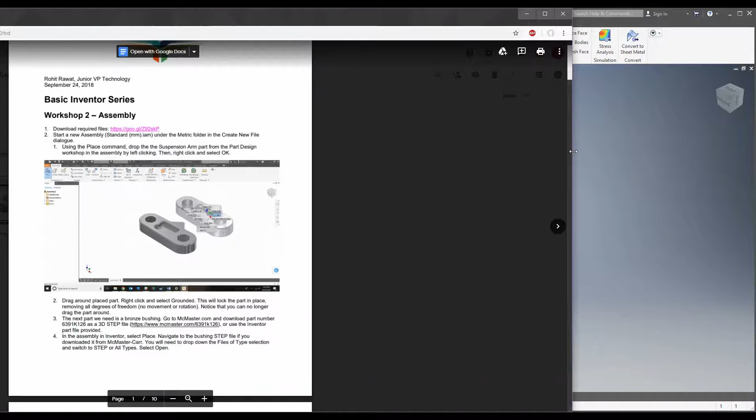I'm just going to hop right into it. Actually, before I do that, if you don't have the files from the first workshop, which chances are you don't, you just go to this link and they will all be there. You can download them as a zip and then extract them somewhere so you can use them, and then you'll be all set to go. You'll have this one and a number of other parts as well.

So today the workshop is on assembly. Currently I have a part open, just one of the parts we're going to be using today. We're not actually going to be editing in part mode. You can tell if you're in part mode because of all the tools up here that you have, like extrude, revolve. Those are all for making parts, obviously.

So our first order of business will be going up to File, New, and under Metric, you want to select Standard Millimeter.iam under Assembly. Ignore everything else. This is what you want. You just double click it, open it up.

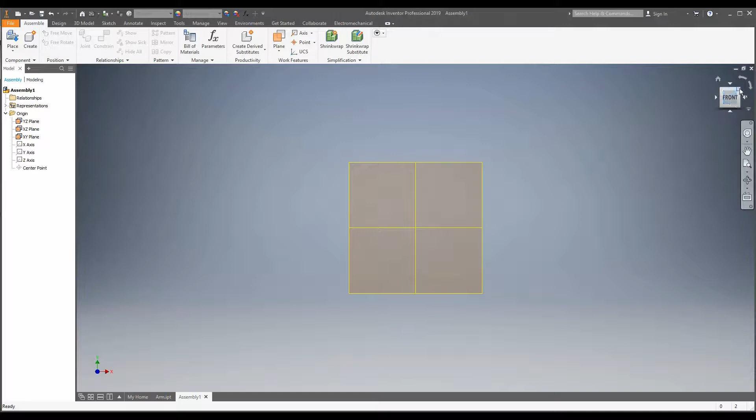It'll take you like 10 seconds for your computer to load it, and then you'll be in this workspace. It's the exact same thing as your standard part workspace. You have your three planes. You can look at them like this. You can rotate it around, same deal as always.

So what assembly is, basically, you just assemble a bunch of parts together. You won't have to make any edits to the parts themselves. You basically just define how they are placed together. Now, I can't really do anything at the start without actually having a part.

So let me just place that into my assembly. You go to Place, and you want to navigate to wherever you have the workshop files saved from where you downloaded them. Once you've extracted them, you should have a folder called Workshop 2 Required Files, wherever you intended to save them to. Go into Workshop Required Files, and you'll have all these parts here. Now what we're going to start out with today is we're just going to go to arm.ipt, double click it to open it up. There'll just be like a ghost of this part kicking around somewhere. Just click it once to place it onto the screen, and bam, look at that, beautiful, gorgeous.

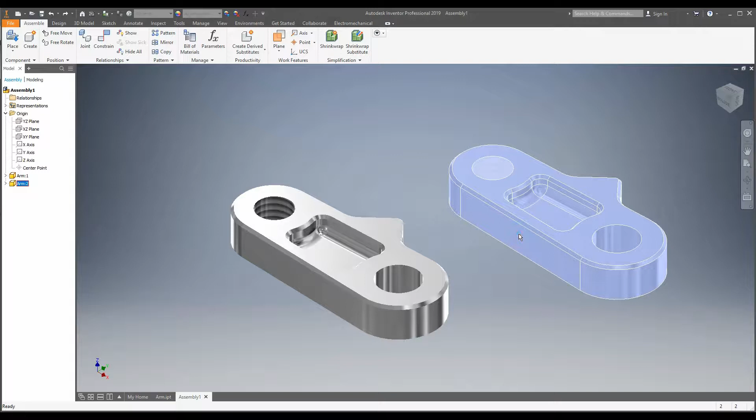It's even got shimmering edges like a steel part. As you'll notice, you're still in the tool. You can tell if you click another one of those around, that's not what we want. To exit out of this tool, you can either hold right click and then go over to OK, or you can just click the escape key. We actually only want one of these though, so just click on one, press delete. You can press the delete key on your keyboard, or you can right click it and say delete.

Easy peasy. Now, a good way to start any assembly is to have one part you want to use as your base part and reference everything else towards it. So if we wanted this part to not move, everything else should be in reference to this part. Right click it, and you go down to grounded. This is a very big menu, just find grounded in there.

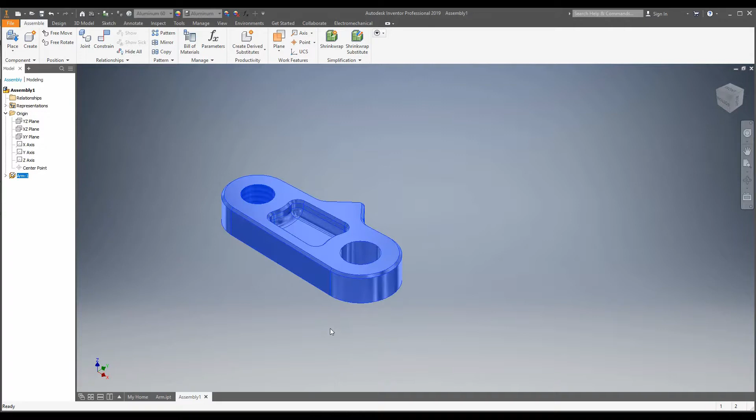When you click it, what it does is it just makes this part, even when you try and click and drag it somewhere, not able to be dragged. If I disabled grounded, I could just move it around however much I wanted, right? Because it's not grounded, obviously. That's what grounded means. So once we have our part grounded, we won't be able to move it. You can check it out however much you like.

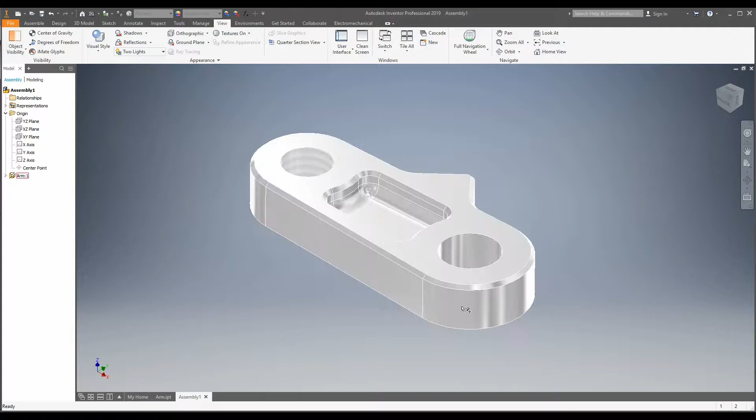One change I'm actually going to make, because I find it easier to work with my parts, is go to View and change Visual Style to Shaded with Edges. You can see it brings out all the actual edges that you can work from on your part. It makes it a lot easier to visualize what you can select when you're doing your constraints in assembly. So once I have all this selected, I'm just going to go back to Assemble, and I'm just going to go over a brief snippet of how you can navigate around your part.

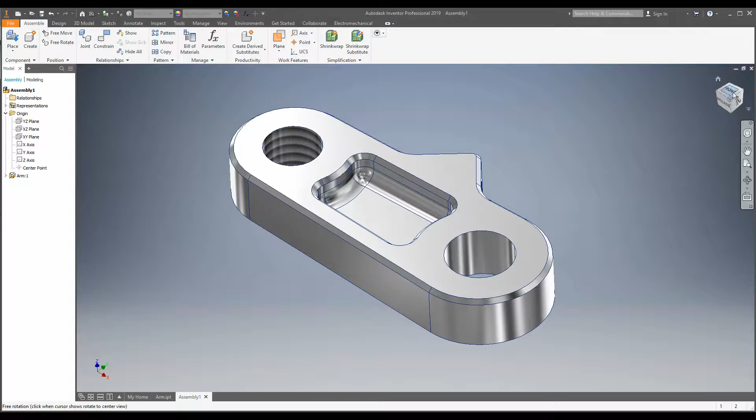So you'll see up here you have the cube. This is your ViewCube. If you click it anywhere, you've probably used it before. I'm assuming you've used Inventor before, and you can use this cube to change all your orientations.

Now, there's a few other ways you can rotate it around. Basically, the principles of CAD involve spinning things a lot, so there's obviously a lot of shortcuts for this, and you'll definitely get better at being able to navigate it. Obviously, zooming in and zooming out with your mouse wheel will help a lot. It's a great tool to have. So make sure you have a mouse. If you try to CAD on a trackpad, I feel sorry for you.

Another way, if you do have a trackpad by any chance, go over to this. It's called the Orbit tool. And you can just drag it around with left click. Simple, easy peasy. Drag it around.

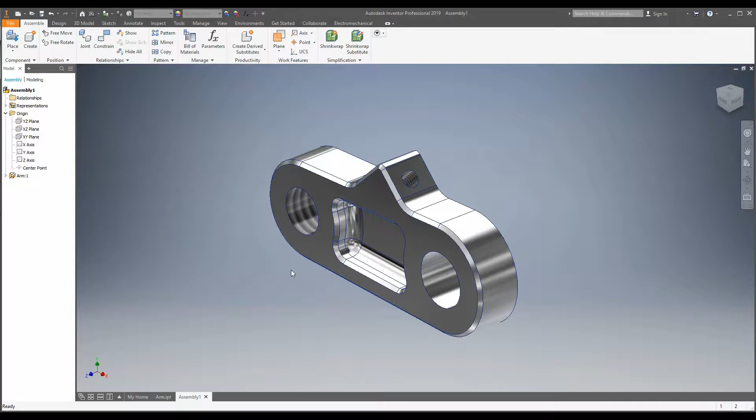Pretty self-explanatory way of rotating your part around is to hold shift. This is only if you have a mouse, but if you hold shift and you hold the scroll wheel of your mouse, so that's like the middle button, if you hold both of those down and you move your mouse around, you can actually rotate it extremely precisely and do whatever you want. Let's say I wanted to look inside this hole. Bam, I can look inside the hole. It's very, very fluid, you'll find.

It is quite annoying holding shift, but as long as you're set up in a comfortable zone, you have a desk and everything, it shouldn't be too big of a deal. So I'm just going to go back to this view, our default isometric view.

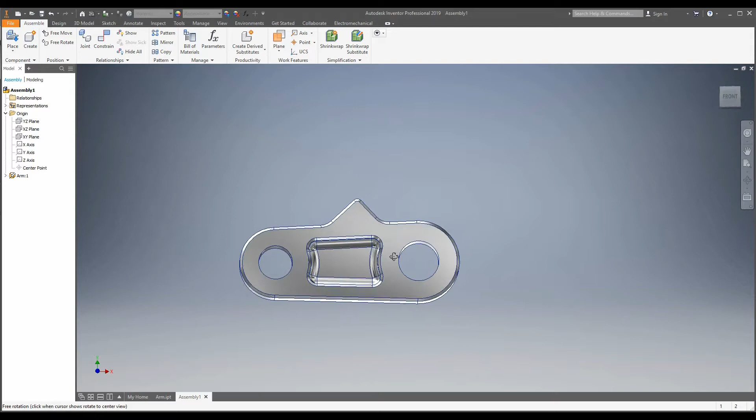Now, what I'm going to do is start putting parts together. Currently, this is one part. It's just got a few threaded holes and an emboss in there. We want to put some bearings in this thing, because, well, I'm actually going to keep it a surprise as to what it becomes later, but we're just going to put some bearings in this.

And basically for any fastener or bearing, anything like that, bolts, a really great website to go to is called McMaster-Carr. You can see it right here, and as you can see, there's tons of different stuff you can select from. Right now we want to select a bearing. So, for the purposes of this workshop, just go to McMasterCarr.com. You'll see a search bar up here, and search 6391K126.

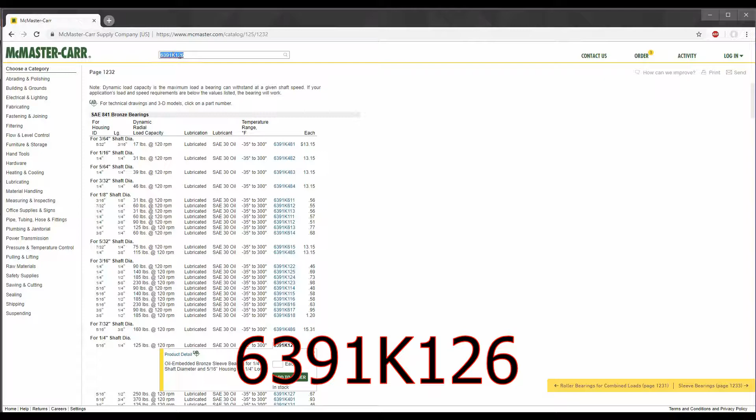When you do that, it'll bring you to this almost spreadsheet-looking thing. And when you go down here, there will be a window opened up under one of the parts. This is the part we want. It's got the part number here. And so what we want to do is we want to get a CAD model of this bearing.

And we want to put it in Inventor. So to do that, we just hover over here, Product Detail. You'll see a little symbol next to it that says CAD with like a little target. Just click it. Easy peasy. It'll take you to this page.

It'll give you a nice little drawing of the part, show you all the stuff that you probably don't care about if you're in first year, but these are all lengths, outer dimension tolerances. It gives you a really simple drawing here.

And what you want to do is go to this drop-down menu right up here, as long as you can see it. Hopefully you can. And I believe it'll probably be defaulted to 3D SolidWorks. You want to select 3D Step.

Now, a step file is a kind of CAD file that any CAD program can use. So if you wanted to use a part from SolidWorks and put it in Inventor, you would save it as a step file, and then you'd open it up in Inventor as a step file. So the step files are really handy for that. So click Save.

It'll download. Then you're going to put it in the same folder as all your other Workshop 2 files. Bam, it's in there. I already have it saved, actually. So then we're just going to exit out of here.

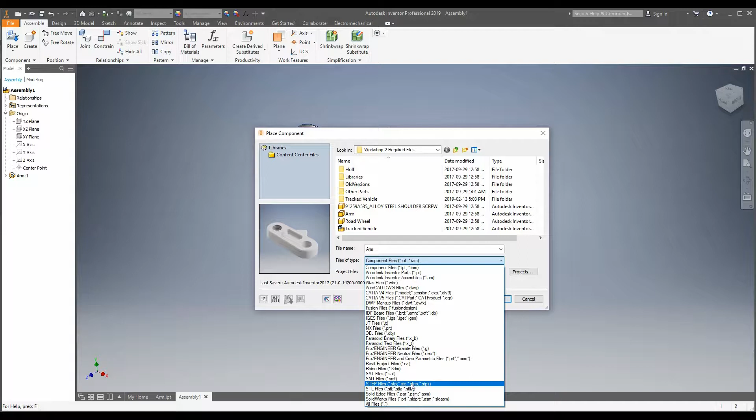Now we're going to go back to our assembly, and we're going to go to Place. To place your tool, see, when you go into Place, it'll have it automatically selected that you can only select Inventor part files and Inventor assembly files. So we're going to go up to Files of Type, and we're going to scroll through this big list until we find step files. It should be right down the bottom in the S's near STL. Click it, and you should be able to see your bearings.

I'm going to select this one I just downloaded at 5:20 p.m.

And it should open up this menu here. It should automatically have all of these settings selected, but if it doesn't, make sure your settings look exactly like this. Make sure Convert Model is on. That's the most important one, because it converts your step file to a workable part file in Inventor. So once you have all this selected, click OK, and bam, it'll come up.

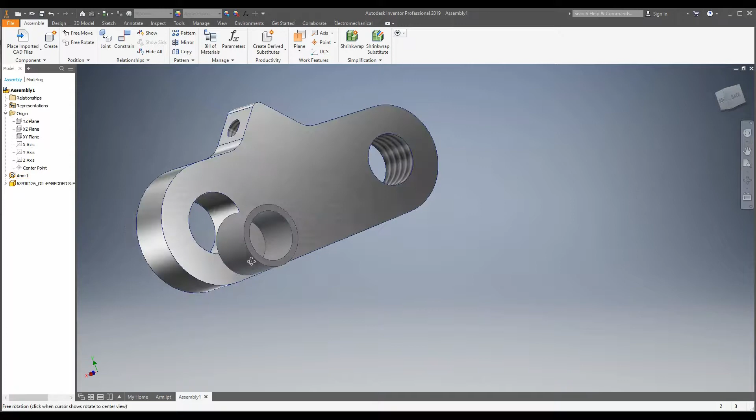Exactly like the part you had before. So place the bearing down anywhere, same thing as always. Make sure to press escape to exit out of the tool so you don't place a ton of them. And here we go. We have a bearing which we can actually move around because it is not grounded. But this, we still can't move it. We still can't move it because it's grounded, and that's exactly what we want.

So once we have our bearing in, we need to find a way to put this bearing in this hole. There's a number of ways you can do this. We usually want bearings to be rigid in this hole, so that it's in the hole, it can't move out of the hole, nothing's going to get it out of there. So nothing's going to spin inside. There's a number of ways we can do this.

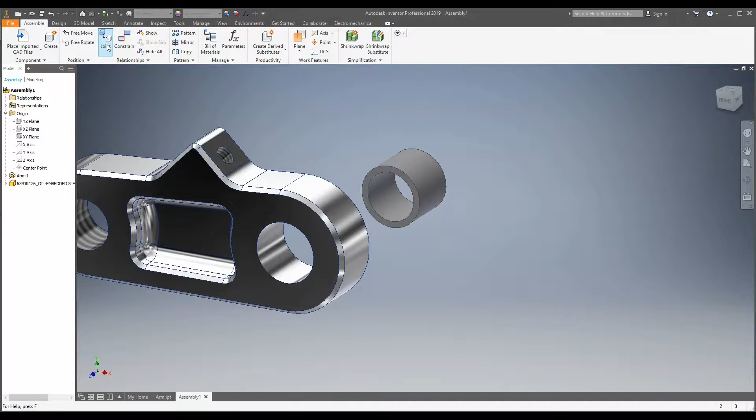We can use the joint tool, which automatically determines the relationships between your component and your assembly, or we can use constraints, which allows you to more specifically adjust how the parts interact with each other. I'm going to start out with the joint tool because it's super duper easy.

So we go into the joint tool. It comes up with this interface. You'll see you can connect your first origin, your second origin, and then it'll ask you for your type. So like I said before, we don't want it to spin or anything. So the type of joint we want for this case is a rigid joint. Click rigid.

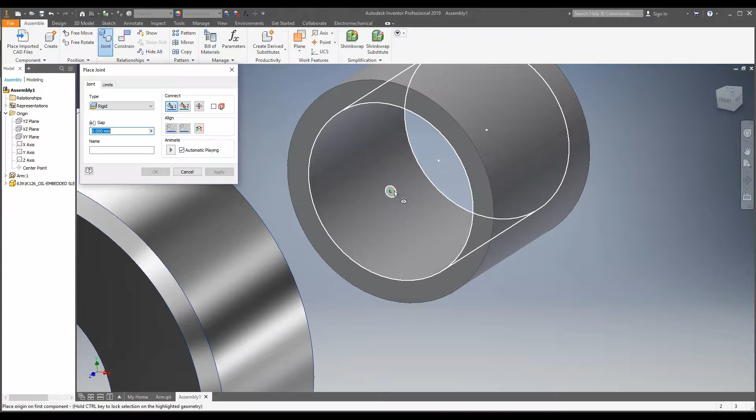Keep gap at 0. Now, for the first selection, select your bearing. Make sure it's your first selection. When you're going to select it, it should come up with these little green circles that don't exist. This is just showing that you're selecting the circle, like the extrusion. Select it. It'll come up with this, and it'll automatically select your second component option. And for your second component option, we just want to do the same thing with the hole on the arm, right? Right here.

And bam, it'll give you this nice little animation of the bearing going into the hole and showing that it can't move around. See? Once you've done that, click apply. And bam, we have a bearing. When we try to click and drag it, it does not move. That's exactly what we wanted.

But sometimes things aren't that easy. Sometimes the program isn't as smart as you want it to be. So I'm going to show you a different way we can do this. First, I'm going to click Ctrl-Z. That just undoes the joint that we made. Another way we can do this is with constraints.

So if you go into the constraint tool, you'll see that there's a billion different options. You'll have mate, angle, and all this stuff up here. Well, let's keep in assembly mode for now. And what we're going to start out with, let's start out with a mate.

What we're going to do is mate the cylindrical axis of the bearing with the cylindrical axis on the arm part. It's actually super duper easy. You click, you hover over the hole on the bearing, same way you did for the joint. It won't show up with a circle this time, but that's okay. Click it, do the same thing on the arm, bam, it'll play this horrible noise, and it'll pop your part into place. Once you click apply, exit out of the constraint tool, you'll be able to see that it can still move through and through, like this. That's not what we want.

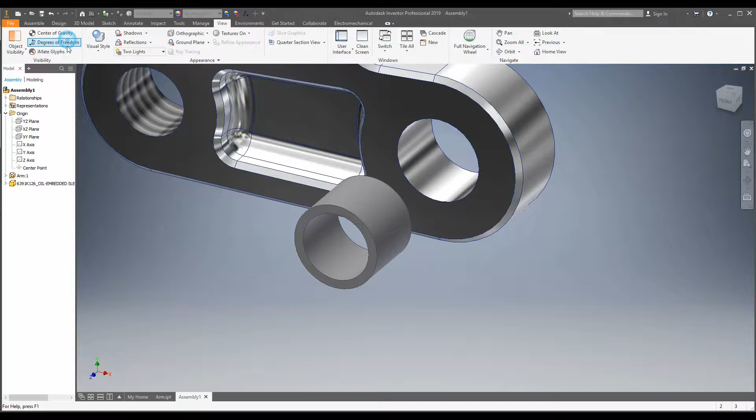So we need to figure out a way to align this face with this face, or somehow tell the program that this has to fit inside the hole and can't move anywhere. If you want, go up to View, and you can see the degrees of freedom of your part. Right now it has a degree of freedom going this way, and a degree of freedom on its rotation. So let's turn off degrees of freedom and go back to Assemble.

First, we want to deal with the whole back and forth problem, so we're going to go back into the constraint tool. If you look at the graphics for mate and flush, you'll see that mate has opposing faces connecting to each other like glue.

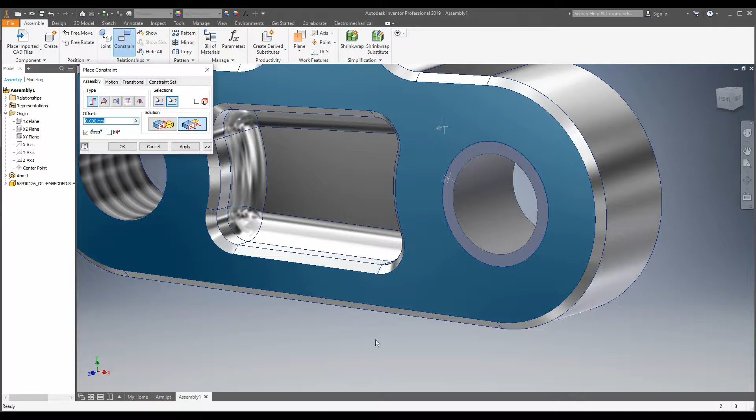But flush basically tells two faces to be aligned to each other. So if we want this face to be aligned with this face to fit the bearing in there, that's obviously what we want, because we can't tell this face to be locked with this face, and we can't tell it to be locked with this face either. So let's use flush, and we want this face on the bearing to be parallel with the face on the arm. Click it, it plays the horrible noise again and pops your part right into place.

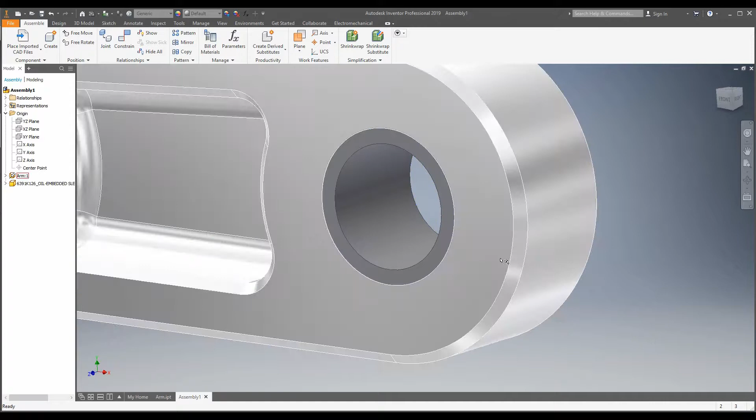Now we can't move it back and forth, but despite what it graphically looks like, I can actually spin this part - it is currently spinning. It's hard to tell because it's completely uniform around, so the graphic doesn't change. But if we check degrees of freedom, there's still that little rotation thing. Let's keep degrees of freedom on for now. So how do we get this thing to stop rotating?

If we go into constraints, we can't use a mate and we can't use flush, because there's no faces to connect. But if we go to angle, you'll see there are a few options. This one in particular, directed angle, will be your best friend, especially in 1C03, when they make you make a PDF of all your constraints and degrees of freedom. So you want to use directed angle, and this basically tells the program what the angle between two flat surfaces should be, in a very easy to understand, direct way. But we don't have any faces to really tell it to do that with right now.

Because we only have the front and back faces, what do we select for the directed angle? Let's exit out of the tool. If you go over to your design tree, hopefully it shows up - if not, go under View, then User Interface, and make sure all these are selected, the same things as me. Go back to Assemble, click the arrow under here, click Origin.

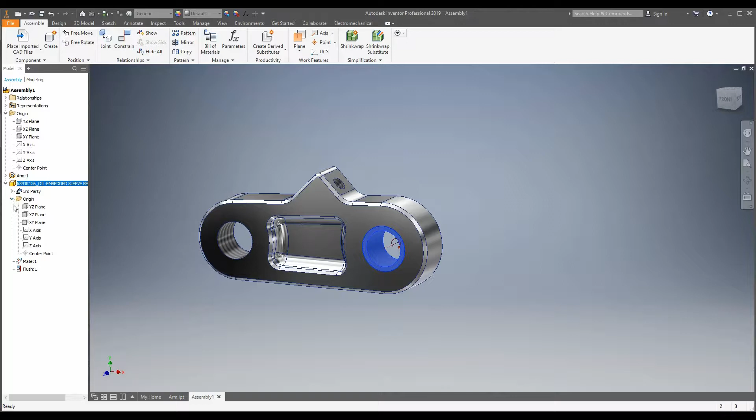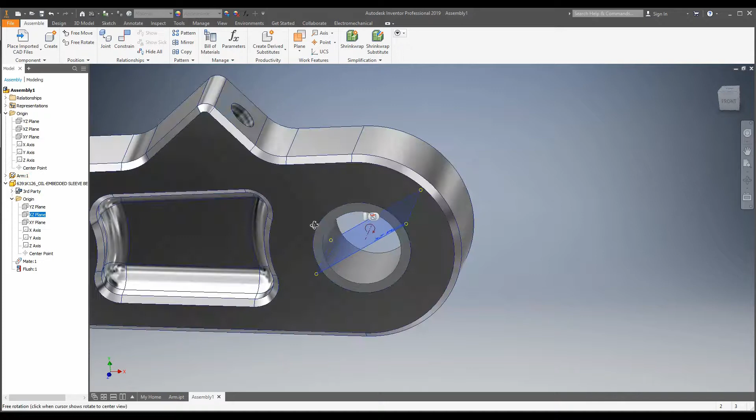What we want to do is find a plane. Let's look at some of these planes here. This plane sort of slices right through the middle, the XY - that's a good one. Our XZ - this one looks pretty good to me actually, because what we want is to say that the plane in this bearing has to be parallel with the plane on the arm. So I like this plane, this looks good to me.

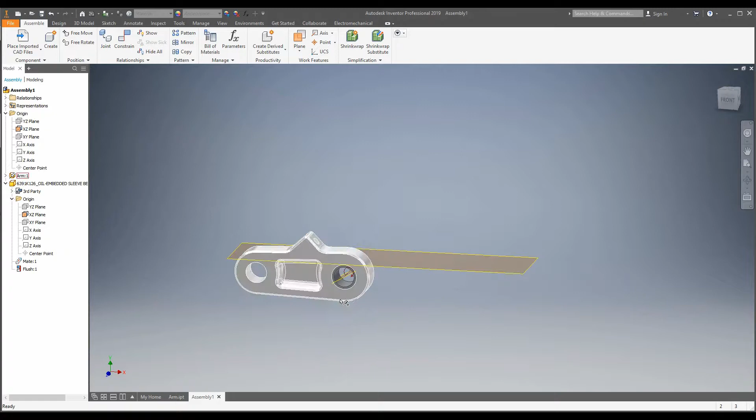Once you have enough CAD experience, you'll be able to visualize it more. But looking at that plane, we could use that plane too actually, so either one of these - let's select XZ for now. We're going to set the visibility to on so we can use it later, and do the same thing, make sure it's the same kind of plane for your big arm part - the XZ plane, that's exactly what we want. And here we go, it'll create this giant orange catastrophe.

Go back to Constrain, directed angle under here. Sorry, I did that a bit fast - just go back and see what I clicked. Exactly what we want to do is select the plane from this bearing, and select the plane from the arm.

These will be a bit hard to select, so make sure you're selecting near the very edge of the plane. Click them both, and make sure that's set to zero. Look, it automatically made this plane flat. Now, once we click Apply, we hide these stupid planes. You have to go back over to the toolbar to hide them. That's the easiest way to do it anyways.

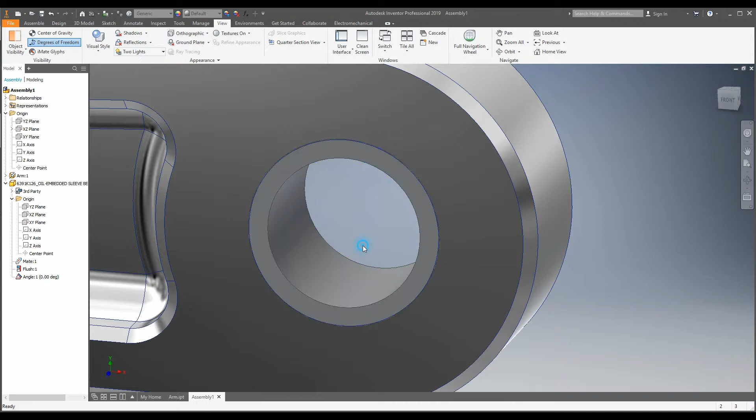If you go back to View, you'll see our degrees of freedom are on. That little circle thing is gone, so that's how you know you've done it correctly. This can't be spun. You'll see the little crossed out circle there, meaning it's not spinning - there's no degrees of freedom. Bam, we have exactly what we wanted.

So let's move on to the next part. We're going to go back to Place. It's automatically in Place Imported CAD Files because we placed a step file earlier. Go back to regular Place, and set it back to IPT here.

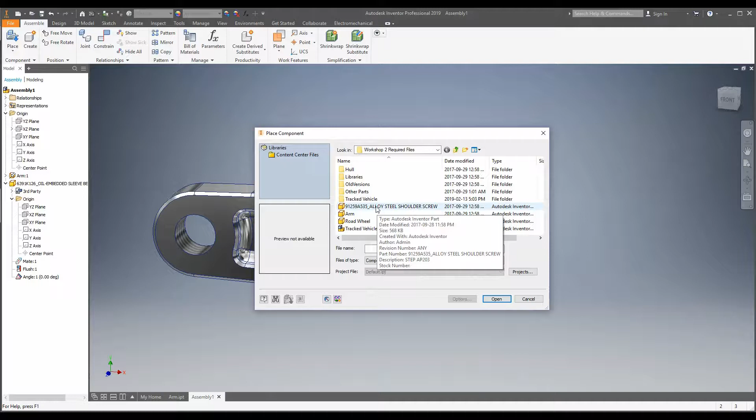What we're going to select this time is our 91259A535 shoulder screw. Click it, place it in your assembly, hit escape. I'm going to turn off degrees of freedom because I personally don't like having them on, but if you like having them on, keep them on.

And now we have this shoulder screw in here. What we want to do is thread this shoulder screw through our... oops, I accidentally double-clicked the part and that opened me up into the edit part mode.

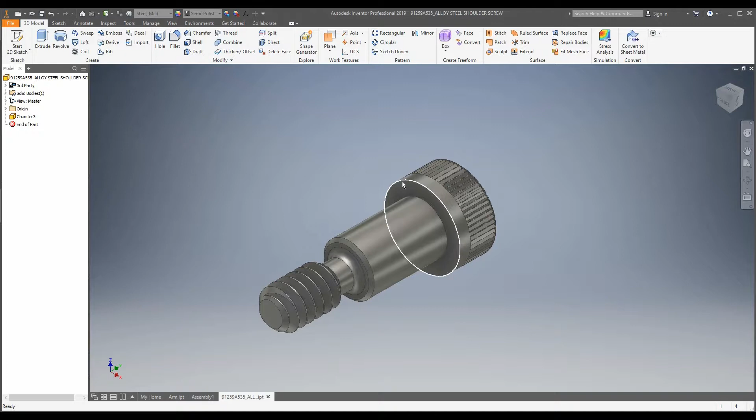So that's another thing, I'll just do that real quick. If you want to edit a part that's in an assembly, just select it in the sidebar here and click Open. Easy peasy. You can make whatever changes to the part you want. I'm not going to change this because I want to use it in my assembly, but as you can see here, we have all the parts and tools we need for changing parts.

You can make an extrusion through the cylinder if you wanted for whatever reason, and when you're done you can just close it or just go back to your assembly down here.

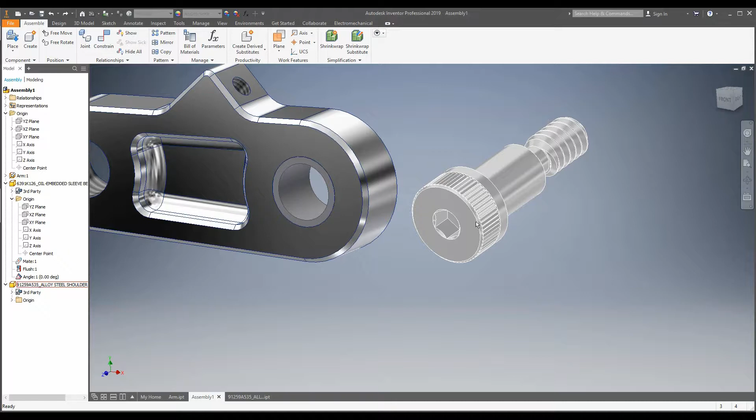Now we want to actually place this shoulder screw inside the threaded hole of the arm. Make sure you don't place it in the part with the bearing - there's no threads there, it can't be placed inside, it can't be placed through that hole. So, go to Joint.

Go to rotational this time. We don't want it to move around - we want it to be able to spin through these threads. So go to rotational, and the part we want to select on this screw, we want to align it up with the hole on here.

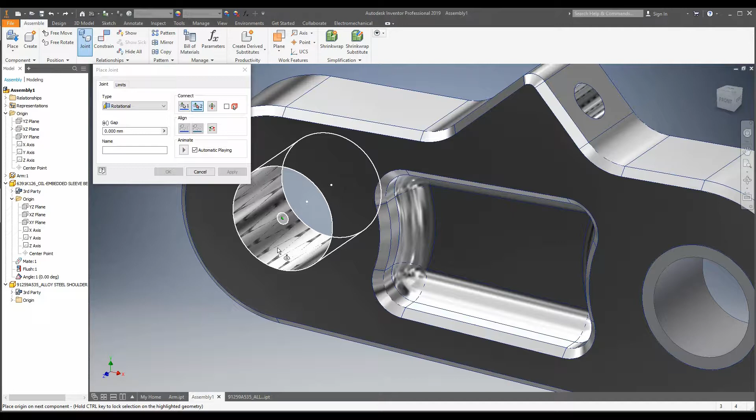A good way of telling it how far through it should go is to select a face on the screw itself. So if you rotate around and find the bottom flat face of the head of the screw, select it, just like that. Then find the same regular hole on this side of the threaded hole, and click it - it'll give you this nice little animation of the screw fitting into the arm part. And that looks good to me.

Click Apply, and bam, we have a screw in the hole. It can rotate around - that's exactly what we want.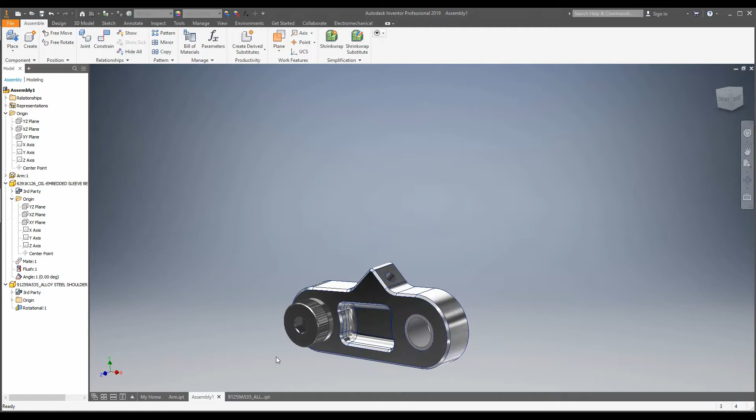Interestingly, if we unground this part and ground this part, this will actually rotate around the screw, and that's exactly what we're going to want. You'll see at the end of the video what this is actually going to be used for, and then it'll all make sense to you. We want this screw to be in place, obviously, because that's what screws are for, and we want this part to move around. So good, we've done exactly what we wanted to do here.

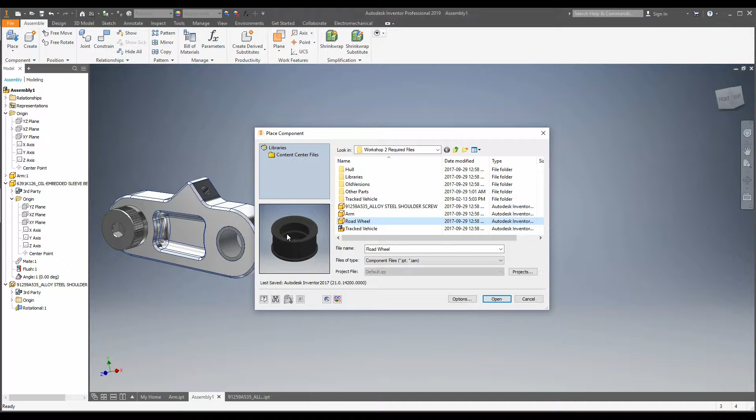So let's move on to the next part. Now we want the next part for our little sub-assembly here. We're going to go to Place, and go down to road wheel.ipt. It's this big black mass. Click it, and place it into your assembly. Now you'll see we have this big-ass wheel in our assembly. What do we want to do with this?

Well, basically what we want to do with this is put some deep groove ball bearings inside this wheel, because it's a wheel, and that's exactly what goes inside wheels. So where do we get these deep groove ball bearings from?

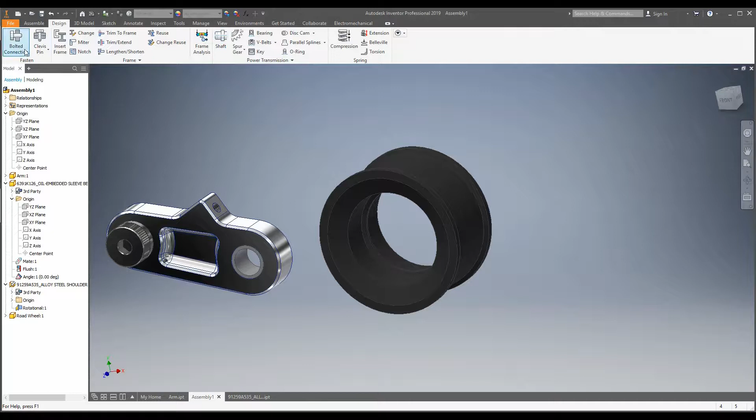A really quick way that Inventor implements bearings and other fasteners into its program is if you go up here to Design, you'll see all these things you can put into your assemblies, and they're very handy. They've got gears, which is probably what you use often. Another good one is disc cams - you'll probably use those in the second year. And you've got bolted connections, clevis pins, all this stuff.

Now, what I said is we wanted a deep groove ball bearing, right? So go up here to Bearing. It'll prompt you to save your assembly, so I'm going to do that. I'm just going to name it Workshop 2.

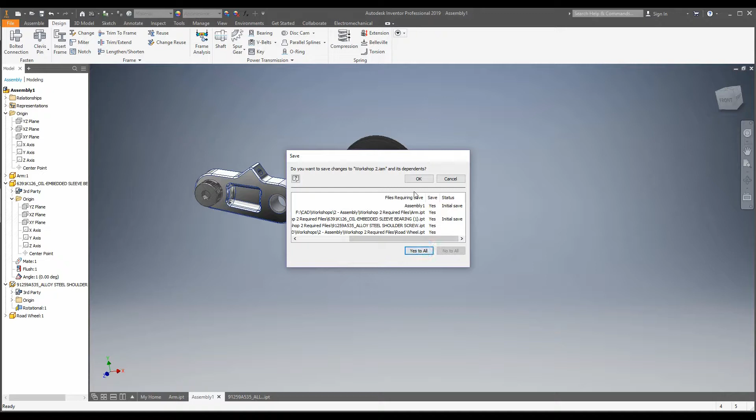Looks good to me. Click yes to all - I always click yes to all. It's not too important, it'll tell you the data format of the step file is changed. Just click OK to everything. Inventor just likes to get worried about stuff.

And now your bearing window will pop up. So basically what you've got to do in this window is it's got a bunch of bearing files saved in Inventor, and your only job here is to tell it the outer diameter and the inner diameter. That's all we want to do right now.

So I said earlier we want deep groove ball bearings. Up here you'll see it says angular contact ball bearings - click the drop down menu and change the category to deep groove ball bearings up here.

That's all we want to do. It'll take you back - whoa, sometimes it's stupid and it doesn't save the selection for you. So just try it again. It's good that I'm making these mistakes, or well, I guess that was the program's mistake, but it's good that this happens so you guys know.

So once you have deep groove ball bearings selected, just click the yellow folder. That'll change this up here. And bam, this is what we want.

Now we want to define what outer diameter and inner diameter of the ball bearings we want, and this will kind of depend on what the dimensions of your wheel are. But for mine, my outer diameter I want to be 22, and my inner diameter I want to be 8. So fill out the fields just like this - 22 in both the from and the to on the top, and 8 in the from and the to in the middle row.

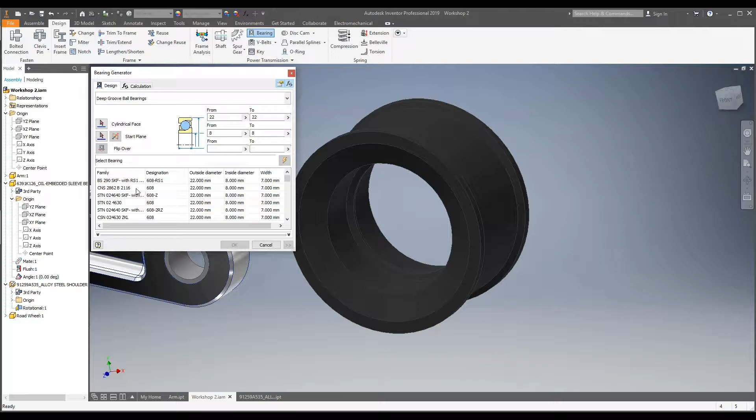Click Update, and it'll give you a semi-brief list of ball bearings, and you can pretty much choose any of these. For the sake of this tutorial, I'm going to click the simple one - as long as it says 608 on it, that's what I want. Click it, click OK, click OK.

Now you'll see there's a ball bearing ready to be placed, and we want 2 of these, so click it once. As you can see, it doesn't work the same way as the place tool does. So what we want to do here is just click and drag, or select it somehow, right click it, click copy, then right click anywhere on this open space and click paste - and bam, you have 2 of these suckers.

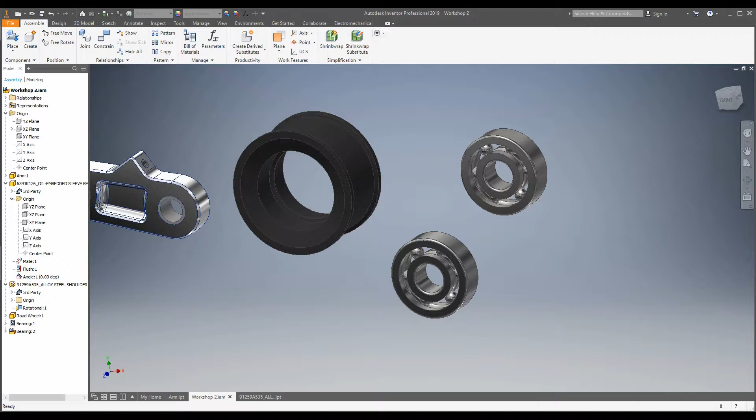So now let's place these bearings inside the wheel. For the purposes of this, I want my bearings to be rigid inside my wheel, so I'm going to click Joint, the easiest tool we can use here. Change the type to rigid, and click.

Now we get to decide - do we want to click this outer face? Do we want to click this inner face? Or do we want to click the axis? This will kind of depend on what part you're placing your bearings into. But for the purposes of this tutorial, it's not too important - that's more of your own design question. So I'm just going to select pretty much any of those.

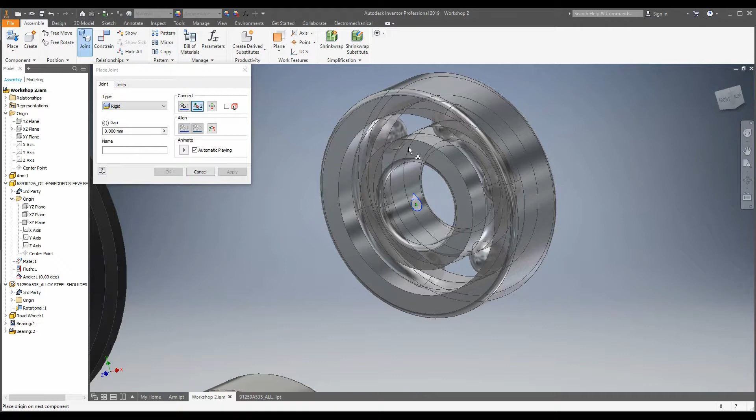I selected the inner face, and now I'm just going to select the hole on the wheel, and I should place it in like that. If you click Apply, you should exit out of the tool. We can see that this is in here quite rigidly - these are connected together. These aren't grounded to anything yet, we will ground them to something soon.

If we rotate around, we'll see that there's pretty much exactly enough space for our next bearing, so that's really nice. Let's just place the other bearing in there with the same method - go under Joint, click rigid, go down to your bearing, click the face, the same thing we clicked for the other one.

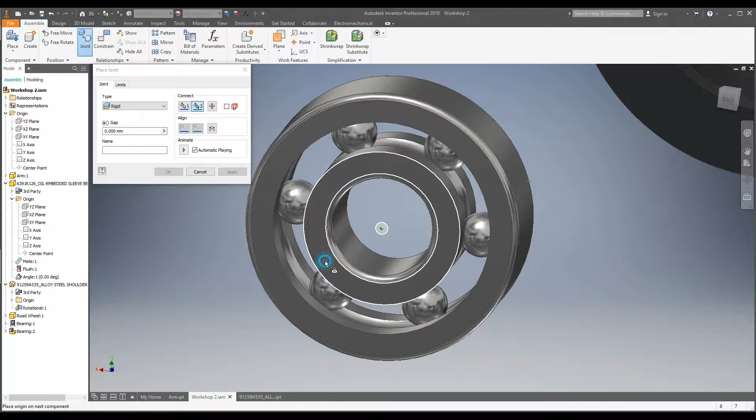Find the proper placement for your bearing inside the wheel. I'm going to choose this one. Looks good to me, nice, it goes in there. It's nice and rigid. Now we have two bearings inside our wheel.

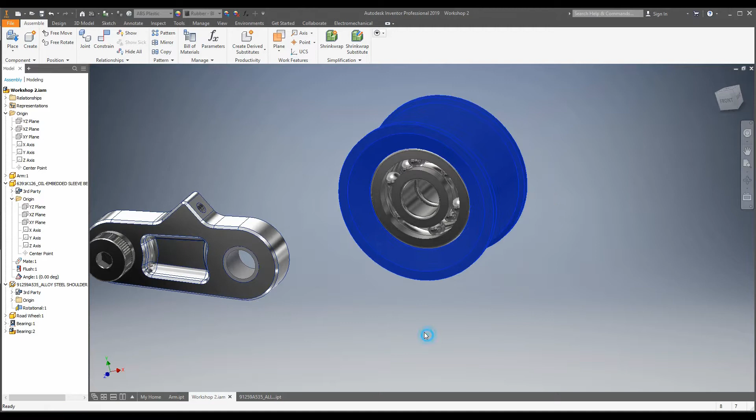So what do we want to do with this wheel? Basically what we want is for this wheel to be along this bearing here, and we want this screw to go inside something so that this can spin around with the wheel attached to it while the screw remains still. So we're going to import another part to somehow fasten these bearings together.

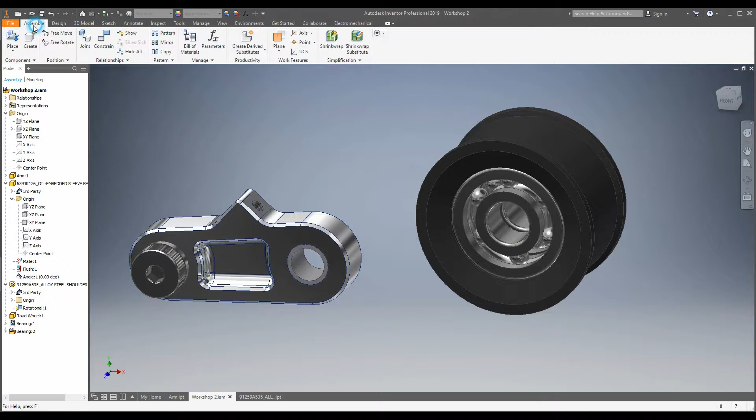Like I said before, under the design part there's a bunch of default stuff that Inventor has saved that will let you place uniquely designed pieces into your assemblies. Another great resource Inventor has is if you click the arrow under Place Component, you'll see there's an option called Place from Content Center. That sounds very spicy, so we're going to click it.

It'll take you to this window. I have a bunch of stuff selected already from when I went through this earlier, so I'm just going to go up to fasteners. Make sure you're in the fasteners window, and make sure you go to bolts. Basically what we want is a bolt to go through our bearings and connect them together.

So go to bolts, go to hex head, and yours probably won't look like mine right away. What you want to do is go up here, click the down arrow on filters, and select ISO. Once you have ISO selected, it should look like this. The bolt we want to use for this workshop is ISO 4017.

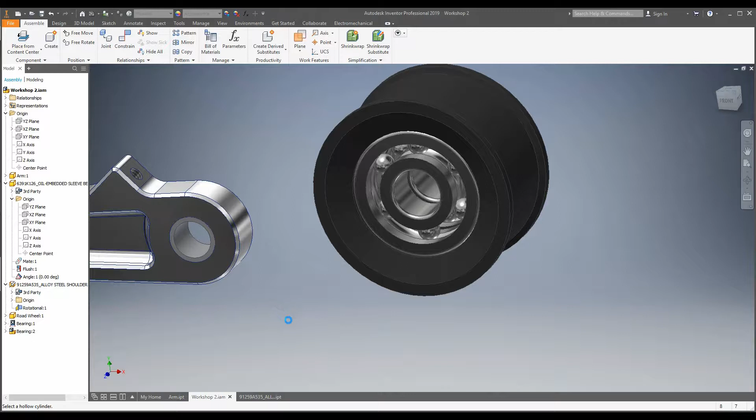Click it, and it'll let you place it anywhere in your assembly, so just place it somewhere. I know it looks rather tiny right now, but don't worry, we can change it after. As long as you click it somewhere, this window will pop up.

This here, the thread description, basically tells the program, depending on what you pick here, how wide the bolt is. And this tells you how long the bolt is. So for the sake of this, we want to select M8, roughly 8 millimeters in diameter, and for nominal length we're just going to select 25. Click Apply, and bam, it's got this nice big bolt.

Click it, place it anywhere. Press Escape to get out of that, and OK, press Escape again. Just if it keeps popping up, press Escape. Escape is your best friend in Inventor to just go back to zero, no tools selected at all.

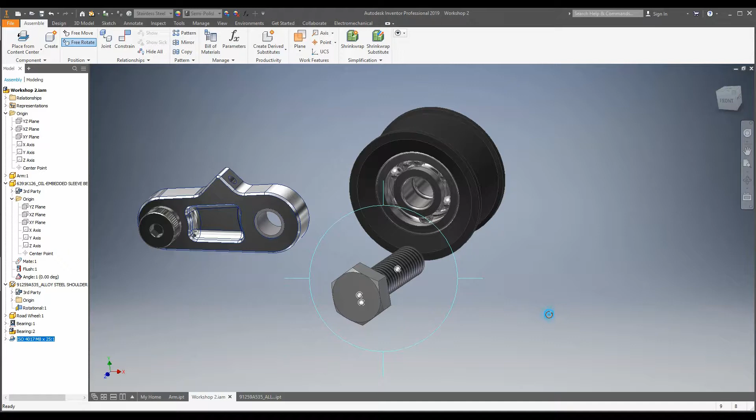So now we're just going to rotate this around. We've got it sort of lined up with the wheel and the arm. How do we place this bolt inside the wheel? Well, if your guess was go to joint and make a rotational joint, you would be exactly correct. So we're just going to do exactly that.

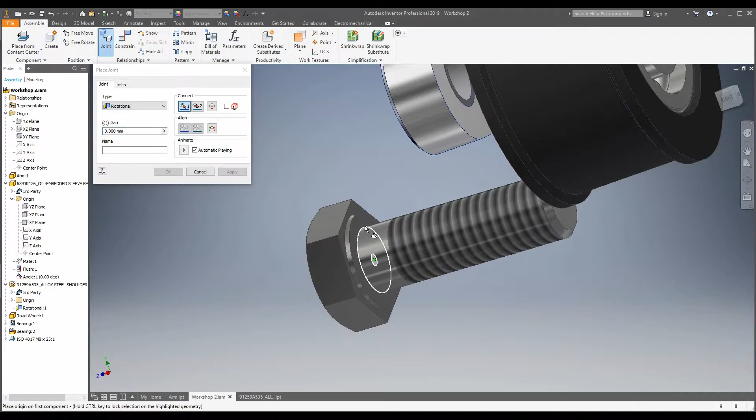We're going to click the underside of the head of the bolt again. Make sure it kind of looks like this, so that the face is outlined. Click it, it should go all ghost mode on you. Then you do the same thing with the face on the bearing, making sure it's the inner face. As long as you selected rotational joint, it should give you this nice little spinning animation. Once you have that, just click Apply.

Now we have a bolt and a wheel, but what we want is for it to be secure in here, and we don't want it to tear anything, right? So what we want is a washer on the underside of this.

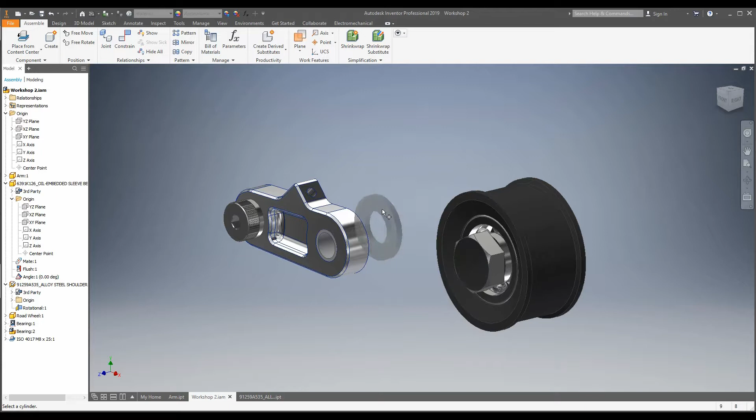Click Place from Content Center again, and this is where I was. The window where I was earlier, if you go here on the side and click Washers and go to Plain, you'll see that, as long as you have ISO still selected, these will be your selections. For this tutorial, we want to use ISO 7089. Click it, and don't place it in your assembly yet—it's a neat little trick I'm about to show you. So if you rotate it around, hopefully you have some method of rotating it around while you have the tool open.

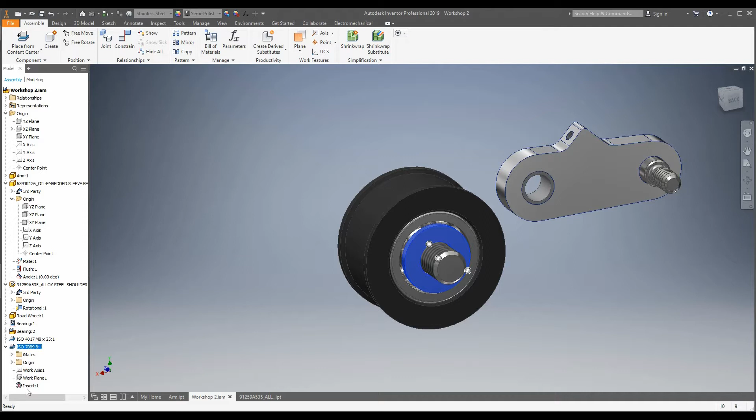And if you go down here and navigate it around, you'll eventually be able to select the inner diameter of the inner face on your bearing, just like this. Once you have this selection, make sure you can select it. Click it, press the check mark, and your washer will be placed on there. Look, we have a washer, it's in there. If you go under the washer, you'll see there's an insert constraint automatically within it.

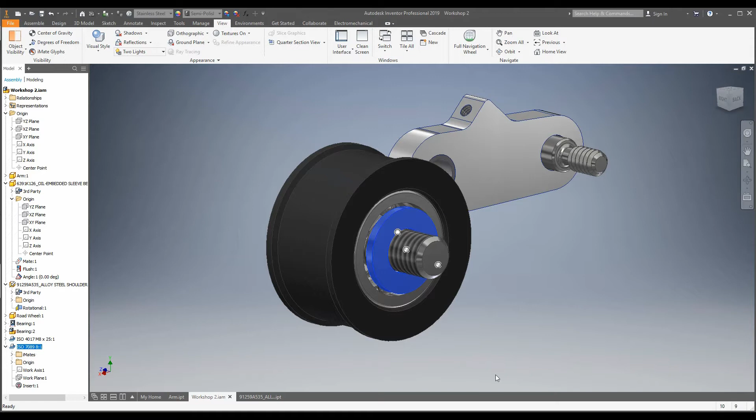If we go to View and Degrees of Freedom, we'll see that this can actually still rotate around. You already know how to change that. You just go to the planes and do the directed angle. I don't really feel like doing that right now. If you want to know how to do it, go back in the video near the start.

Now, once I have this little sub-assembly all set up, I want to attach it to here. So how do we put these two assemblies together? Well, if we just pull on each of the parts here, we'll see they all move together and you cannot move them around. So go up to Joint, and we want another rotational constraint, because like I said before, we don't want this to be stiff. We want all of this moving around the screw.

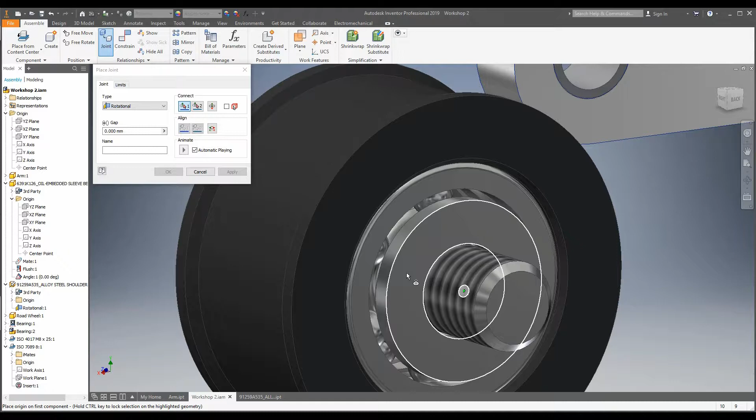So go to rotational, go down to the other side here, and click the underside face of your washer. Make sure it's the outer face. Click it, it should go all ghost mode on you. Now go over back onto the arm, make sure it looks like this, and click the outer face of the bearing you placed in at the very beginning. Click it.

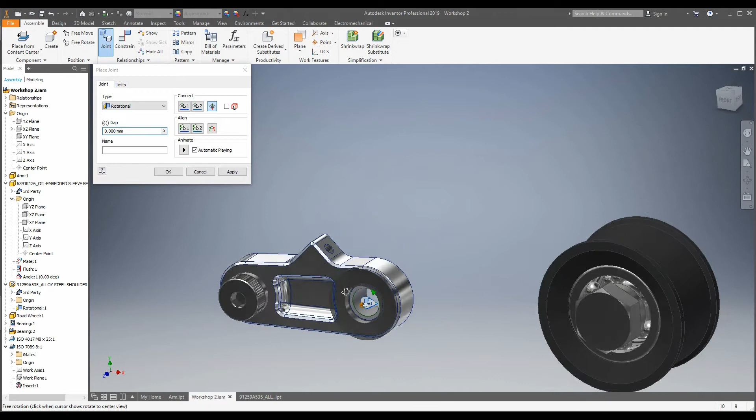Sorry, that's actually just the animation, so it will only show the washer coming. That's just because it's a tricky little thing with joints and constraints - they don't play well together. As long as you click apply, bam, it should show up. It looks nice, looks good to me. Exit out of the joint tool, play around with it, and look, it moves around.

It's great, it's gorgeous, I love it, I love it so much. So this is a nice little assembly we've got going on, right? This is really nice. So let's move on to our next part.

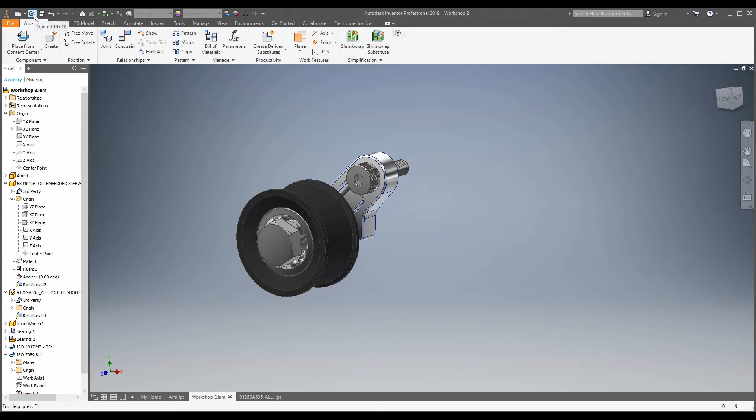After you click save on this assembly, yes to all, we're going to open up another assembly from the required files. Go up here, click on open or Control+O, and click on tracked vehicle. If you have thumbnails on, it should look like this orange treaded thing. Click it. Now you might get this menu pop up - if this gives you strife, hit skip all, we just want to tell it to shut up. That's basically what you want to do with Inventor all the time. Okay, good, good, this is exactly what we want it to look like.

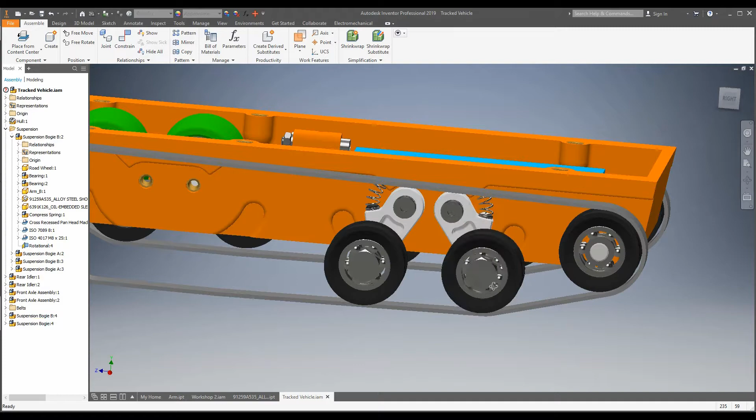So once we have this assembly open, do these look familiar to you? They should - this is the part we just made. So what we want to do is show you how to place more of these in these little through holes that we have here.

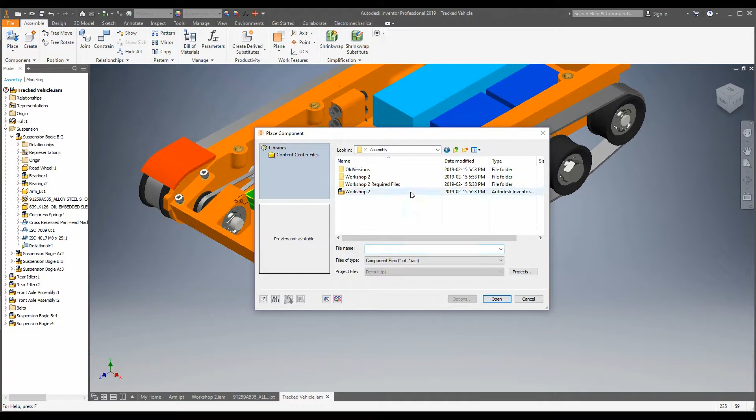So I'm going to reset my view and place. Go under the arrow in the place tool, hit place, and find wherever you saved the previous assembly. I'm having trouble remembering - where did I save it? Aha, here! It's called workshop2.iam. Double click it and place it in your assembly.

Now you might notice I actually want two of these wheels, but don't worry, that's going to come back around. So once I have it placed in here, I'm just going to line them up. It's a good habit to get into, lining your parts up before you do the joints and constraints, because it makes the program's life easier - it doesn't have to know exactly what you want it to do, so it doesn't have to flip around the parts. If you try it without lining it up, you might see some weird stuff going on.

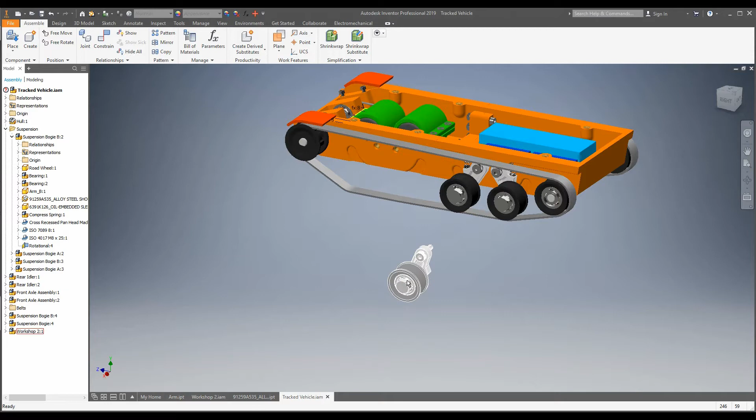Remember, you can always just click the part, hit G, and they all spin around. Oh, see, now I've gone and screwed it up. Okay, there we go. Now we basically want this screw to go into this hole and spin around. So what does that seem like? It seems like a rotational joint. You'd be exactly right if you guessed that. Go into joint, click rotational, like we've done a few times before now.

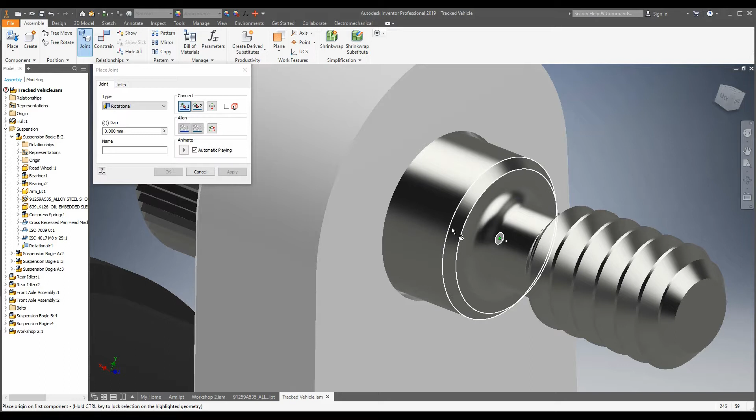Let's select. See, what do we want here? Do we want the arm to be on the hole, or do we want the screw to be on the hole? Now, like I said before, the arm is supposed to rotate, and the screw is supposed to stay in place. So let's put the screw in there.

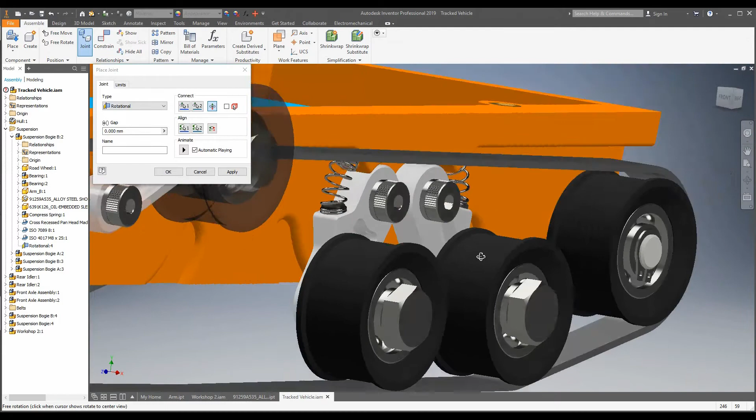Oh, I might have selected the wrong thing. No, I think I'm good. So, go over here, find your hole, and place it in. Looks like it's rotating nicely. If we analyze the ones we already have, you can see that we actually want the arm to be selected.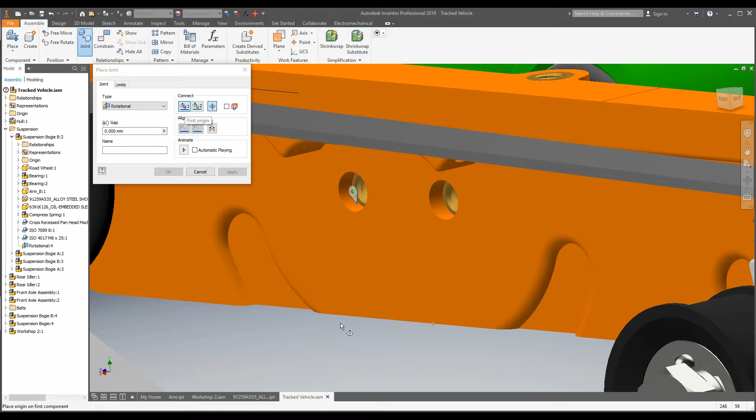So, good old me, I've screwed it up. Let's go back. Don't play that animation. Let's select our first component again. And to do that, if you want to just save the selection that you have of the hole, you just click back here, back to first origin. Yeah, keep the second. Don't touch the second origin. Keep the first origin. Let's go back.

Let's select this ring here, that's actually selecting the diameter of the extrusion or the bearing that's in this hole of the arm. So if you select it, it'll go back into the assembly. Sorry, that might have been a bit spooky to look at.

But if you play the animation, wow, that's really smooth. Wow, that's really nice. I'm just going to play it again because it looked so nice. Gorgeous. Hit apply. That's exactly what we want.

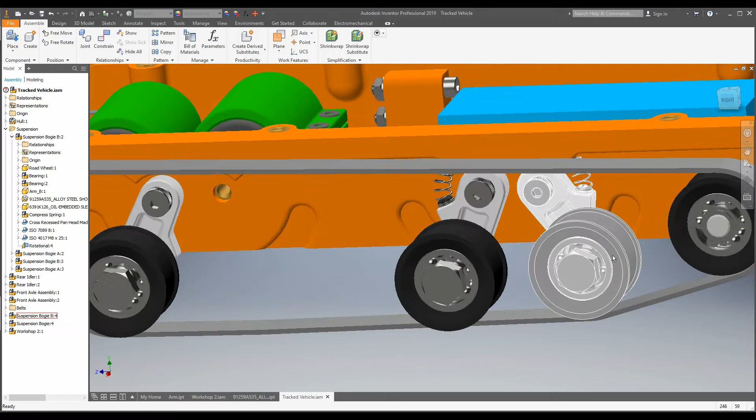Look. But if you'll notice, we only have one. What's the deal with that? So you'll see that these ones, they don't exactly look like the same part, do they?

So what we want to do is we want to go over here and we want to do the mirror components. Click mirror. Now, here's where it gets a bit tricky. Mirror tools in most programs aren't exactly the most user-friendly things, but we'll try to keep it as simple as possible for this.

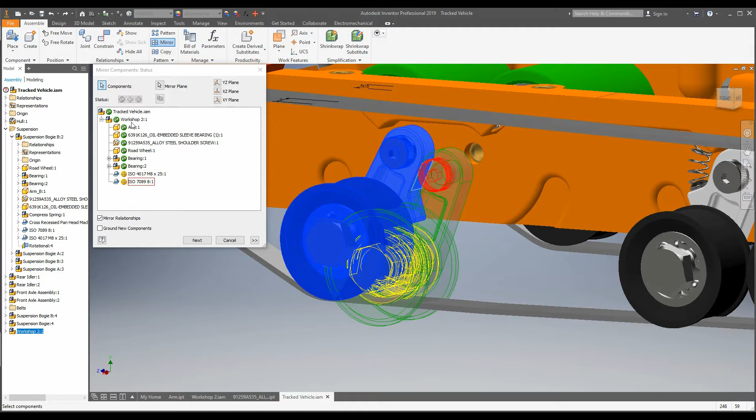So we're just going to click on the component we want. We're gonna make this really easy on ourselves. We're just going to click the component, and we're going to click mirror plane. We're going to select this face, and it should look like this. Leave all this alone. For some reason, this part doesn't play nice.

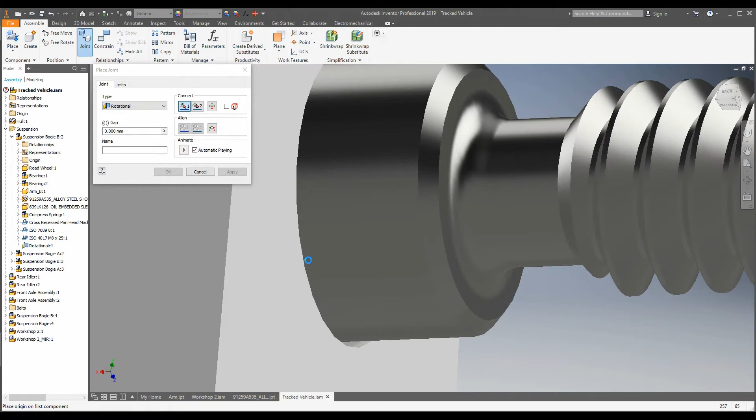So we're going to click next. Click OK on this absurd selection screen, and we've got a part here, and we're just going to attach it to this hole the same way we did with this part. Go to joint, go to rotational. Sorry, I'm going through this rather quick, but slow down the video or go back in the video to when I did this before.

Just place it in here. It rotates around exactly how we want. Looks pretty good to me. That's my favorite saying, by the way. Looks good to me. There we go. We have two wheels placed on this little track device.

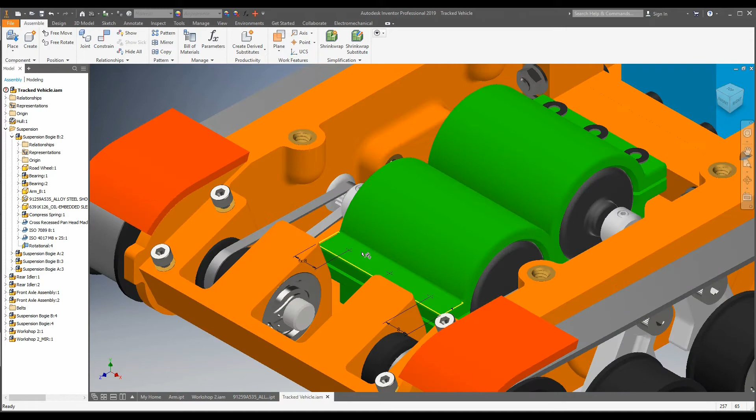Looks pretty nice. Now there's one more thing that's actually not right with this assembly. If you notice there's these stupid little numbers up here and little projected lines, it's pretty hard for me to select them right now. Let's analyze this. Let's examine it for a second. So why does this look unfinished? Well, if we go to the other side, oof, there's supposed to be bolts here.

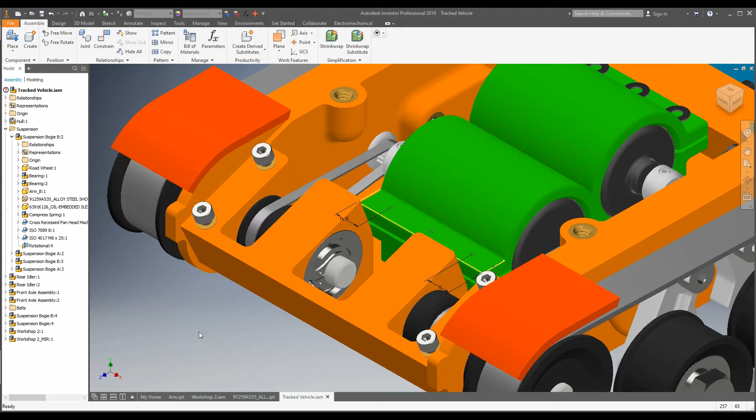Anyways, what we want to do is we want there to be bolts upon these points here. Basically, what we want is for those points to have bolts going through them through a hole and have some washers around them. So we can do this by opening up the assembly, making some extrusions, importing some bolts, and constraining them in there.

Or if we just have these points, we can do it in a really quick and easy way. So to make this easier on myself, I want to just select this green motor part, right? So I'm going to go up here in my assembly. I'm going to see what the heck that part is. I'm going to find it eventually. Go under hull. Go under motor collar 2. And we're going to right click it and click isolate.

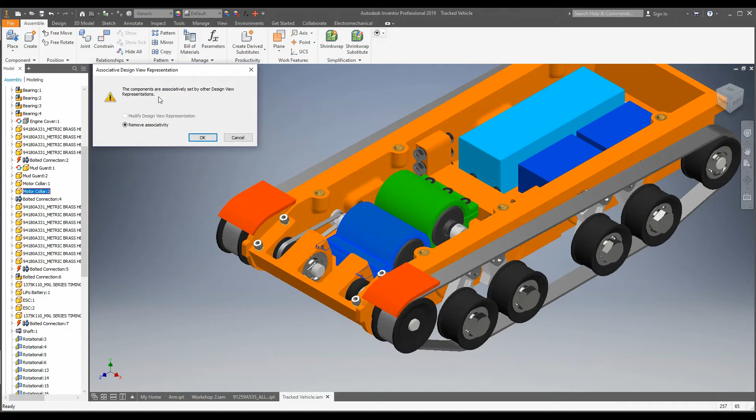It'll come up with this window here. Click OK, like everything else. And bam, we have it nice and isolated so we can work on it easily.

Now what we want to do is go back to your design tab, go to bolted connection, make sure this is on point.

Click, so it'll come up with these two selections here. We want to start with our start plane, and that basically says where does the bolt go into a hole, where does the hole start. So in this case, our hole will start on this flat surface, so click that flat surface.

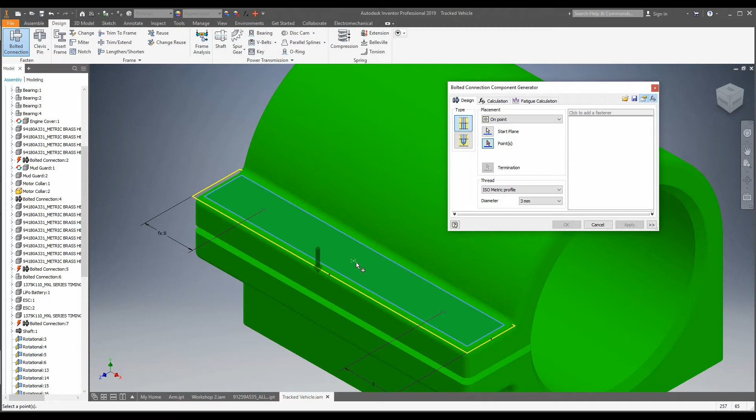Next to our selection, it'll automatically select the points for you. These points are all part of the same sketch, handily enough, so if we click one of them... yeah, there we go. Once we click one of them, they'll all be selected. I know it doesn't look like that with the arrow, but trust me, they're all selected.

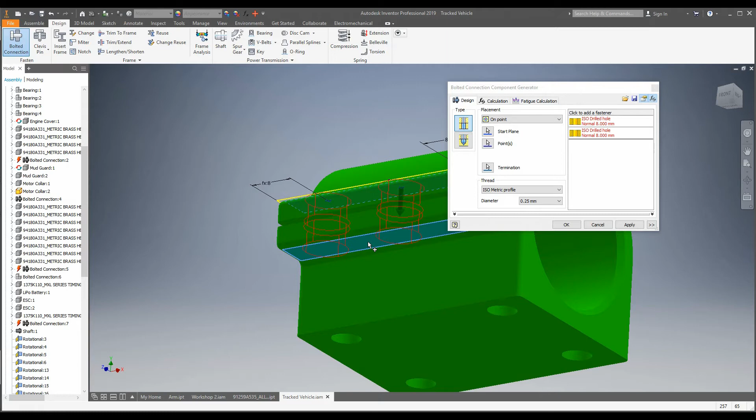Rotate your part to the back side, because now we want to do the termination, and this is where the hole ends. We don't want the hole to go forever, so we want to select a termination for it. Click the last plane on the underside here, and it'll give you this preview of these thick looking holes, these big bad Jacksons, and we just want to trim these down to size.

It'll show you over here what hole diameter it's using at the current moment. I believe for this we want to use ISO Metric profile, go to 3 millimeters, and as long as it looks like they're going through all, you should be good. You can do it up here as well. As long as this type up here is selected, it should automatically be selected, then you're good.

Now up here it says we have some drilled holes, but there's no fasteners yet. We haven't told it which bolts to use. So we're going to go up here and we're going to click to add a fastener.

Click to add, and if you navigate your way to this menu, we're going to go... which one do we want to do? Let's choose socket head bolts. And let's do 4762.

Now it'll give you a nice little preview of some bolt outlines. But like I said before, we also want a washer to go with this bolt. And if you see in this menu here, see how the bolt is on top? And see how there's an add a fastener there in between it, and see how there's the drilled holes? This is actually representative of what the connection looks like visually. So we have the bolt on the top, right?

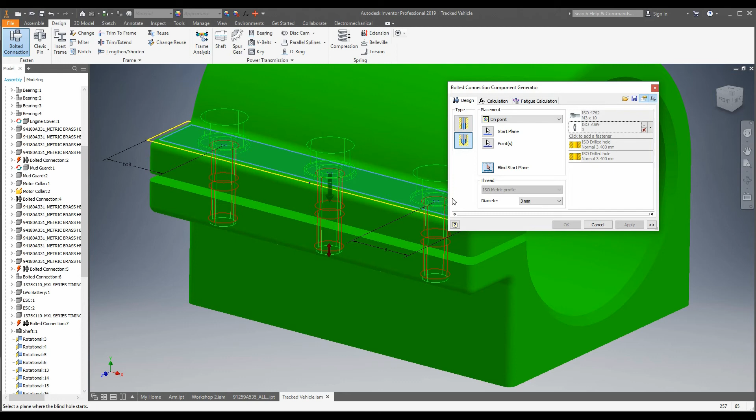And look, I already have it selected. As long as you can navigate your way to washers, click ISO. I'm going to use the same ones as before, 7089, and it shows up in the preview. So that's cool, that's exactly what I want right now.

If at this stage you can't click apply or OK for some reason, just go back and reselect your surface, your point, and termination, and make sure everything is okay. Because sometimes if you click too many times, the program can get confused.

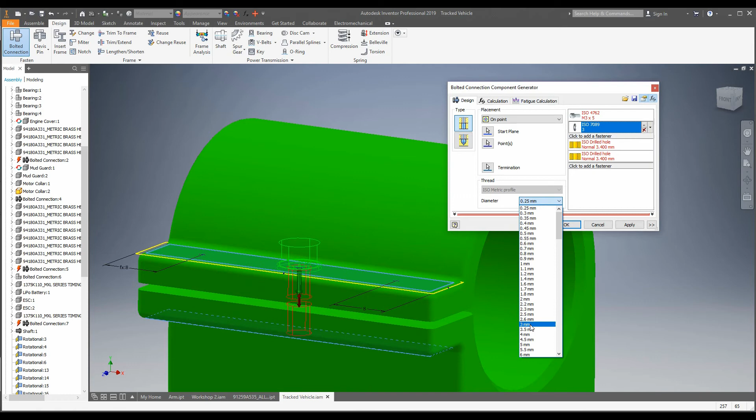Basically, once you're done and you click apply, exit out of the menu, look, you have these bolts. As long as you did everything correctly, it should look like this.

And now our part is still isolated, so let's go back to it. You can actually just right click. I believe you can right click anything, any of these parts that are grayed out. As long as you right click anything, you can actually undo isolate. It makes it super easy to navigate for you. And bam, this is exactly what we wanted.